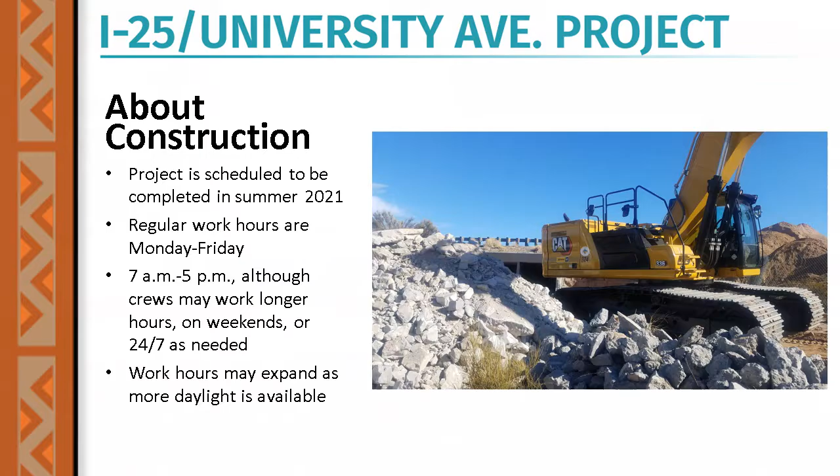So this picture right here is the box extension. It's just to the east of NMSU. This box is being extended to facilitate an on-ramp from the university to I-25 southbound.

Construction began on January 2nd, 2020. Some of the activities were shifted because of the completion of the preformed wall panels. I don't want to say delayed—they haven't really been delayed, it's just they're taking a little bit longer than what we expected. So in order for the contractor to keep going, they've shifted to different phases of the project so it's still completed on our scheduled date.

Completed so far is detour paving for southbound I-25. You guys would see it if you're headed southbound—there's some detour paving that was put in there.

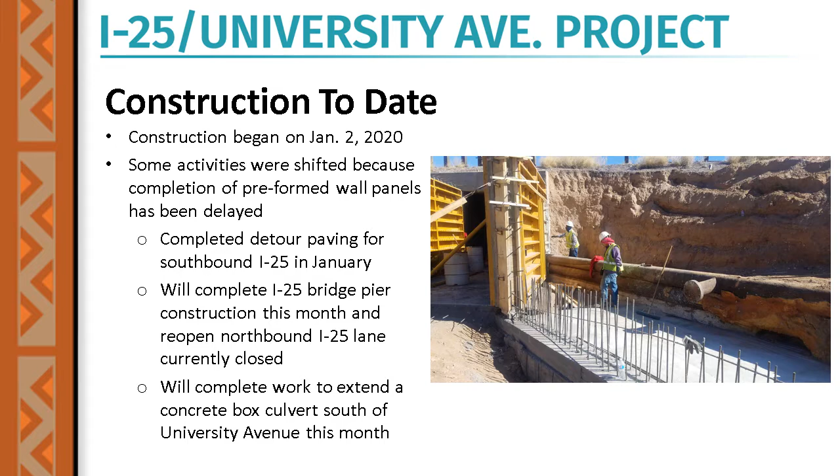We will complete the I-25 bridge pier. If you guys have driven on 25 underneath the University Bridge, you will have seen all the steel that's been erected—I'll show you in the next slide. Today they started setting up the form liners to place that pier.

So far, the only thing that's been closed or kept closed is the northbound inside lane. We will continue to try to keep everything open for you guys so it functions as normal as possible. So far, I don't think we've had any major issues. The traffic backup you see coming into the university is the same backup you guys have seen even before construction.

So this is the pier that's being constructed right now. You guys can see all the rebar. This is the median of the northbound and southbound I-25. Also, the contractor has built a retaining wall with concrete wall barrier, which is on the off-ramp headed southbound.

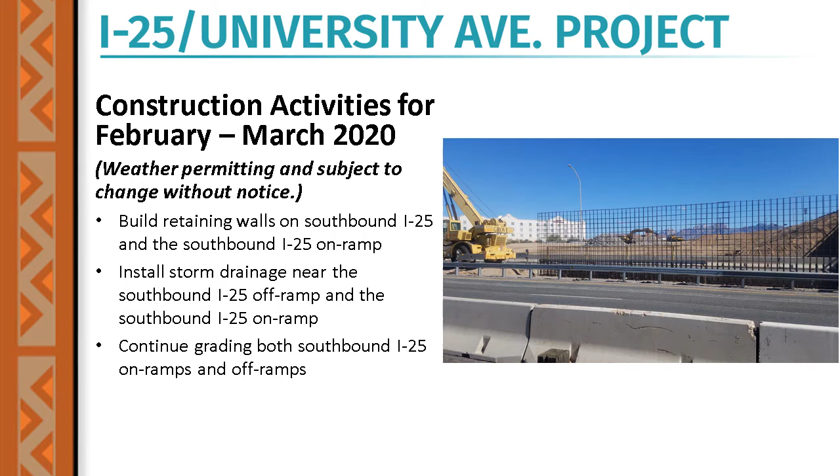The contractor is going to be working on installing storm drain near the southbound I-25 off-ramp and the southbound I-25 on-ramp. They will continue grading both the southbound I-25 on-ramps and off-ramps. Again, this shouldn't affect the traveling public.

Construction activities for February—this is what we can expect. I don't think there's going to be much of a difference, Saeed, correct me if I'm wrong. The northbound I-25 loop ramp will remain open, and they're going to try to keep it open as long as they can, from early February through early March. We'll notify everybody, the traveling public.

Has the website been working for everybody? No? Is there something that's been missing from there? So I had a couple residents that said they tried to ask questions—the entry into being able to access questions, they're getting an error message instead. Okay, so we can take a look at it and see what's wrong with it.

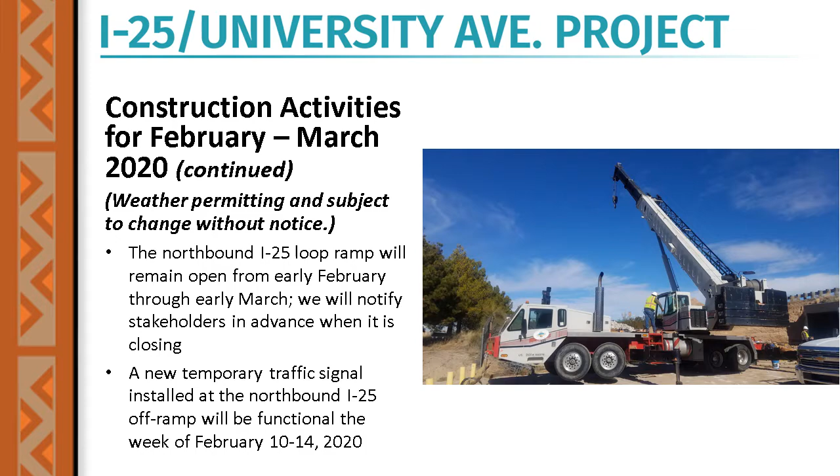A new temporary traffic signal will be installed at the northbound I-25 off-ramp and will be functional the week of February 10th through 14th. If you've traveled through University, you've probably already seen the poles being put up for the temporary signals. The temporary signals are basically what's already there, so nothing's going to change.

I'll hand this portion over to Wyatt. Good evening, everybody. I'm Wyatt Karchner with Molzen Corbin, and I'm just going to walk you through the project a little bit before we go through the simulation, so I'm going to skip back here a little bit.

So just to orient everybody with where this diagram is, the hospital is located over here, the Pan Am Center is in this bottom corner here, and I-25 is running down the middle. So northbound is going this way, south is this way.

With this project, some of the main things we were trying to accomplish was to clear up the backup that happens on I-25 southbound into the university. We did that in a couple of ways, and you'll see it in the videos, and I'll explain it as we go through it.

As you're headed southbound, you will be able to exit with one lane just like you do now. You'll have a choice to either go down underneath University Avenue into this roundabout for direct access into campus, or go up to University Avenue just like you do right now into a signalized intersection. So that's pretty simple and doesn't really change.

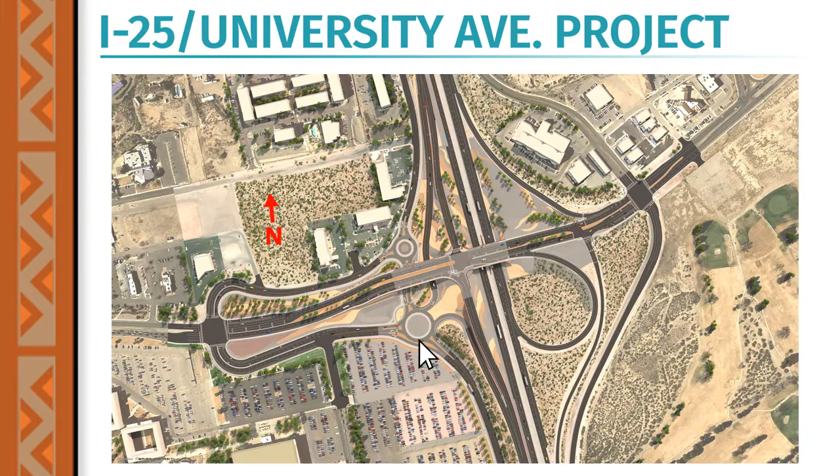So if you're coming from the south to the north, that movement doesn't really change other than this intersection is no longer backed up because of the left turns. All of the southbound traffic should be going underneath University Avenue and directly into this roundabout, and so this intersection here should free up pretty significantly. What we've talked about in special events with NMSU police is that they would potentially close this leg of Triviz during special events so that traffic on I-25 southbound would have free access around this roundabout and directly in, so they would never have to stop.

So right now, when you're coming south, you come up here and you stop because they've got the signal in a flash condition, and you wait for them to tell you what to do. All of that should be cleared up, where traffic coming south will just free flow in. And because of that, traffic going north won't have to deal with all of the 100,000 people, or whatever it is, trying to get in from the south. So it's kind of nothing directly, but indirectly there's impacts that are beneficial.

So if they go up to Lohman and turn around and come back, that's definitely a nice way to do that, yes ma'am. But not really at University, other than the intersection should be better and that'll be synchronized. I don't know if they'll turn it off in a special event, I can't promise you that.

So I'm going to see if these will work. So in this simulation, you're headed on I-25 southbound, you can kind of see the dot. This is back towards the Missouri Bridge. You're headed south, and you can see you've already exited off. You'll come to this overhead sign structure, and the overhead sign is going to say University Avenue, left lane, NMSU right lane. So you can see this car is going to go in the left lane, so they're going to go up to University Avenue. You can see the split here, so now they're climbing up to University Avenue.

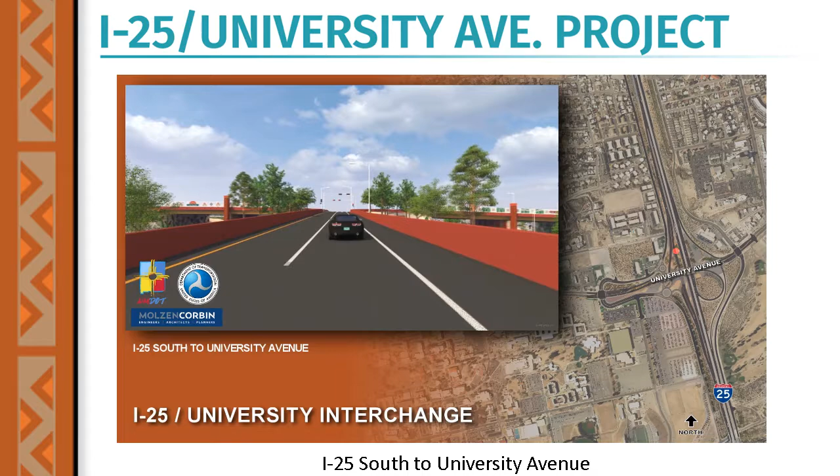This is basically the same movement that you have right now as you're going on I-25 south. And then they're coming up to a signalized intersection at University Avenue. Again, you could turn right here and go down University if you wanted to go further down University, or you could turn left and go to the hospital, for example.

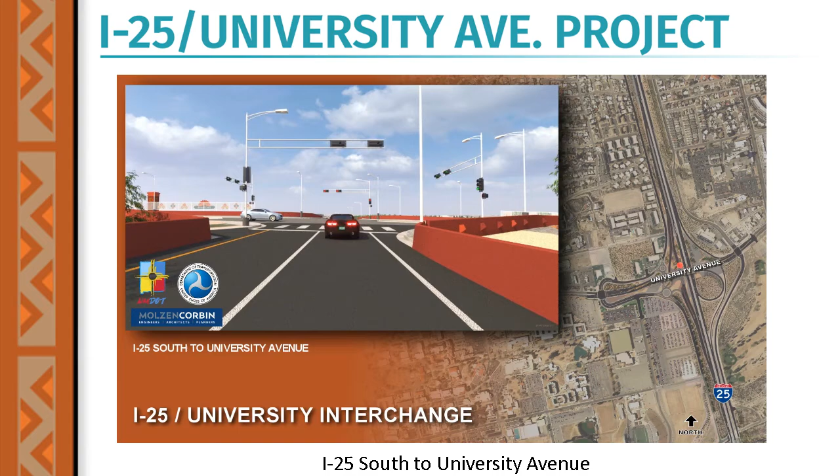This next one is on Triviz, headed south. You can see here's like the slip lane, so you're coming into the first roundabout. The bicycles actually have their own dedicated lane through the roundabout, so you're not dealing with roundabouts and bicycles mixing. And then you're going to go underneath University Avenue, is what this is.

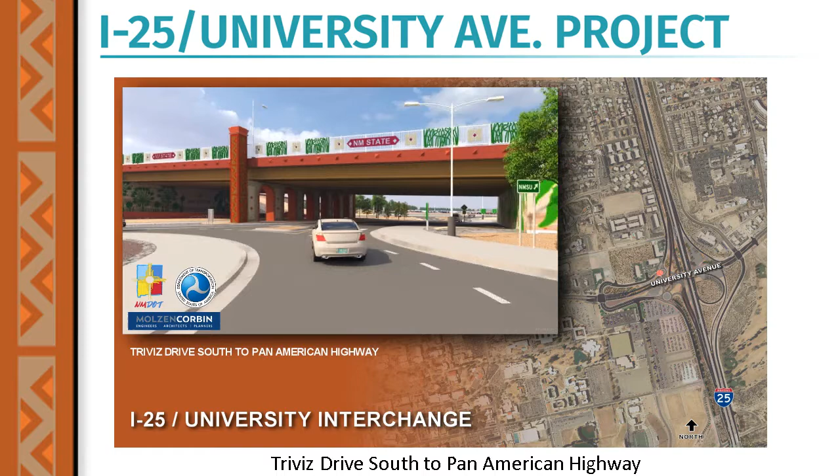And then you're going to go into the large roundabout on the south, and again you can see it's one lane. Then, as I talked about before, there is another lane of traffic over here, but you can see it's separated by a barrier, so you're never having to mix. And then this will take you directly into, say, the Pan Am Center parking lots or BCOM or something down there.

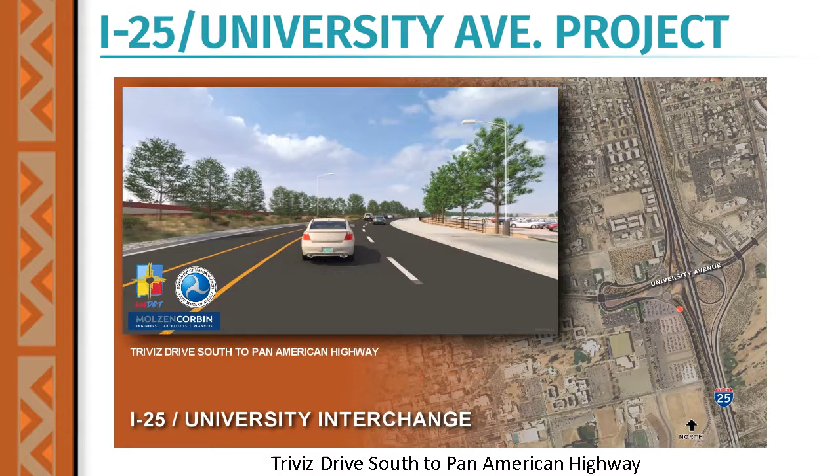This simulation is actually the movement that I was talking about earlier. So if you're coming from the parking lot and you're wanting to go south on I-25, you can simply come into the south roundabout, take that first leg. You can see the sign there that says I-25 South, and you'll get directly onto the interstate going southbound. You can see there is significant artwork, and I'll talk about that a little bit more in a minute. But you're going south, and then the traffic that's coming from University Avenue getting on the interstate, you would merge with them at this location.

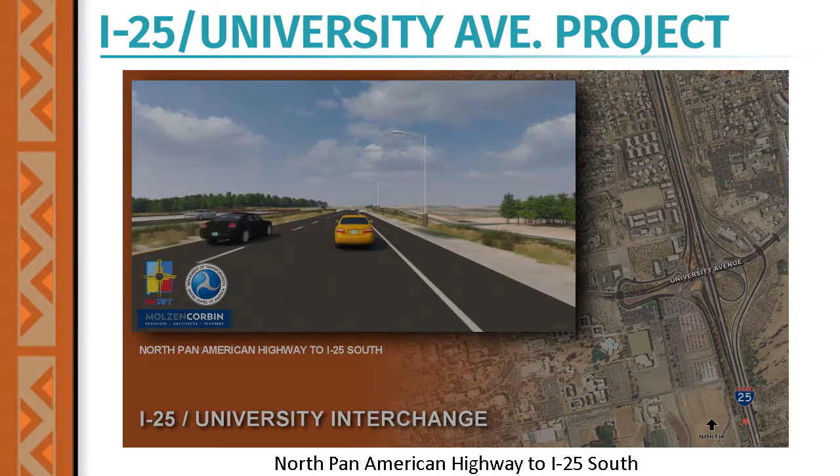And then continue into one lane before you merge into I-25 southbound traffic. Yeah, it's really long now. It goes all the way to geothermal, so it'll be a really long ramp that you can get up to speed without having to try to merge. And so this is the new movement that's being enhanced with this project.

So this is I-25 southbound again. This is the student that's going to class maybe. He's already exited onto the off-ramp. And again, here's the same overhead sign. So our previous one, they went in the left lane to go to University. This one, he's going in the right lane to go down to Triviz. Then he's continuing along here. He's going to go underneath the new bridge at University Avenue.

This is not a student that's late for class, obviously. And then they're entering the roundabout here. You could take this exit here and go to Triviz. You could take this one and go back to University Avenue, but they're simply going around and down to Wells Street or something like that.

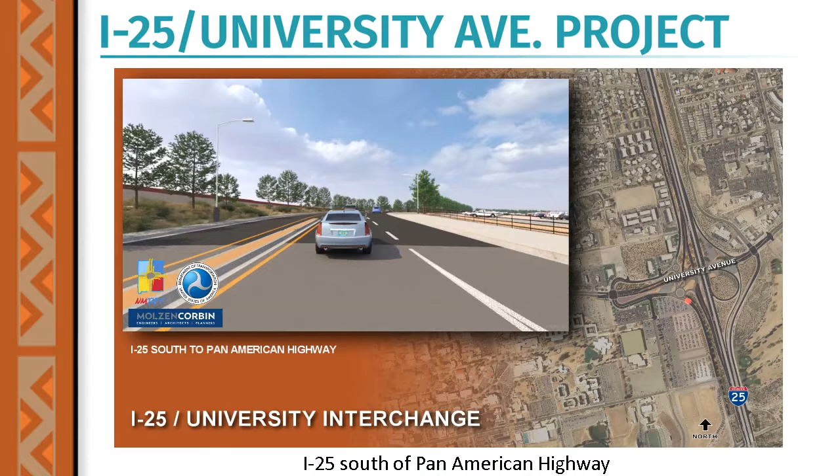And so I hope those help clear things up, and we can look through those again if we need to. But I want to go through some of the other things that are on this project.

Aesthetics is a huge thing that you guys have probably seen on all of the bridges in Las Cruces, and this one is no different. This one serves as kind of the gateway to Las Cruces and NMSU, and so we took that into consideration with the themes. You can see here, here's the I-25 bridge and University Avenue. So you can see on the bridge that actually says Las Cruces in both directions. And then as we go to the NMSU bridge, it actually says New Mexico State University.

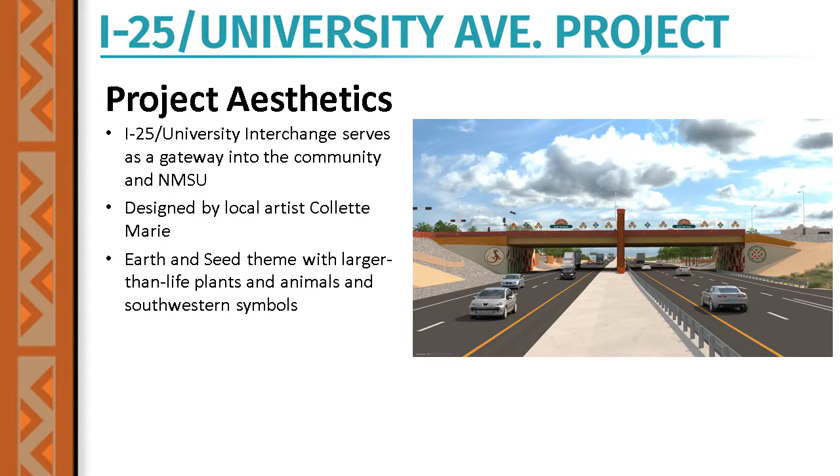The art was actually designed by a local artist, Colette Marie, here in Las Cruces, and you can see all of her patterns, like on the walls, are larger than life, I guess you would say. So there's huge plants that are on these walls, and it's really impressive. We had a presentation from the Formliners manufacturer that was building these, and they actually have artists sculpting each one of these panels that are getting built. I think there's 500 and some odd panels on this project that are being built, so it's quite a process.

Probably the thing you guys are wanting to know is, what in the world do I do, and how is this going to impact me during construction? As Ryan kind of told you, what you've seen right now is probably what you're going to get for the large majority of the project. We are not planning on closing any lanes on University Avenue. We did most of that detour work before school started. I-25 southbound, we built that detour paving so that 2 lanes could be maintained. Northbound, probably in the next month, it'll be 2 lanes again.

But what we're telling people to do is seek an alternate route. That's easy to do - go somewhere else if you need to. One of the biggest things is just give yourself a little extra time. I know we're all in a hurry, and so an extra 2 or 3 minutes and you'll get through it just fine. Be aware that if there is an accident, it could be a little bit longer of a delay.

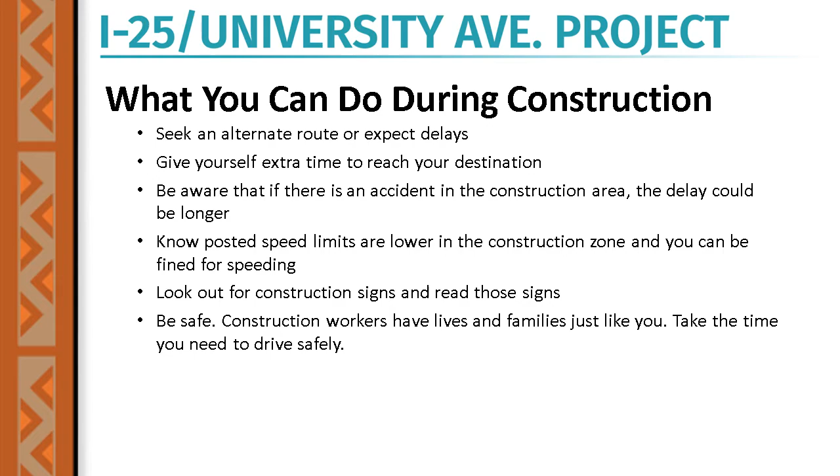One thing that we really want to keep you guys informed about is the speed limits. Not only do we want to keep you guys safe as things are changing, we want to keep the workers safe that are out there, because there's no reason that an extra 5 miles an hour is worth somebody's life. So we want to make sure that we watch out for people. Make sure you read the signs as you go through things. As things may shift, it's not going to happen very often, but just make sure you're aware of those things.